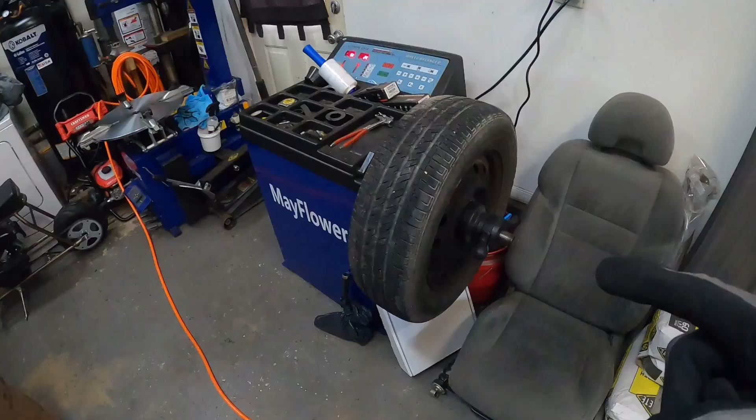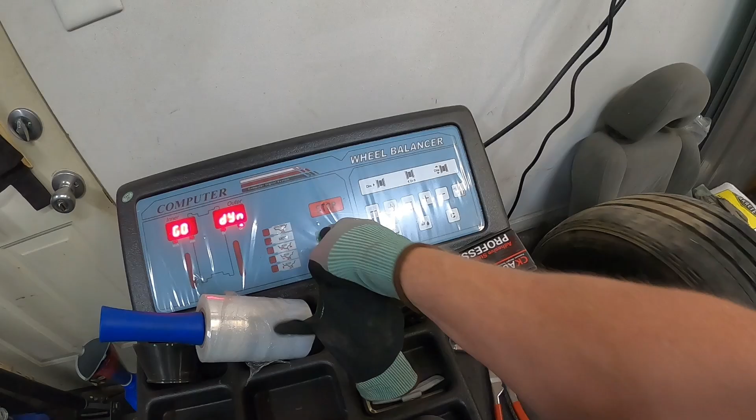So it came with some, the front tires, which we'll get to the car in a minute. Front tires were bald. Guy gave me some new front tires. I'm checking to make sure the tire looks like it's nice and round, because these are used tires, making sure that it doesn't have a belt broken or anything like that.

So I got one there, that looks good. I need to get the other one over here and get it checked out also, make sure that it's nice and round.

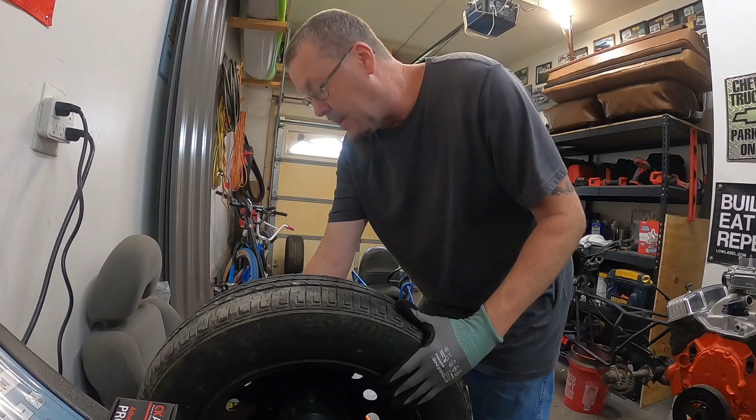And then, what I'll say, it's nice having your own machine.

So all we're using is the tires off of this.

All right, same thing, that one looks nice and smooth and round. So I'm not worried about the balance. I know the balance is off, all that kind of stuff, that's not what I am concerned about. Just wanted to make sure the tires were good.

Now, this is why I love having my own machine. Having my own machines just makes it so easy.

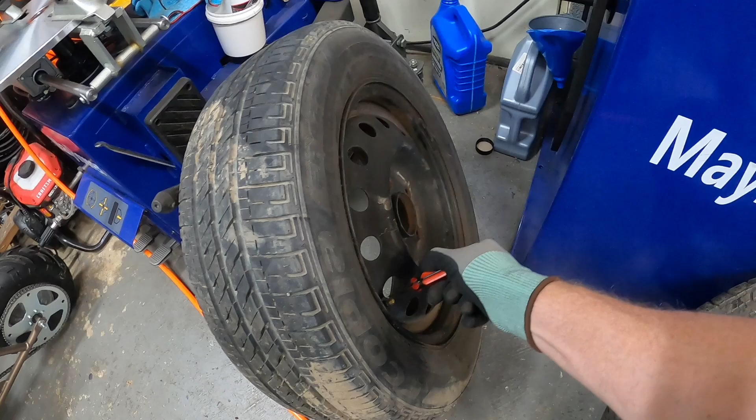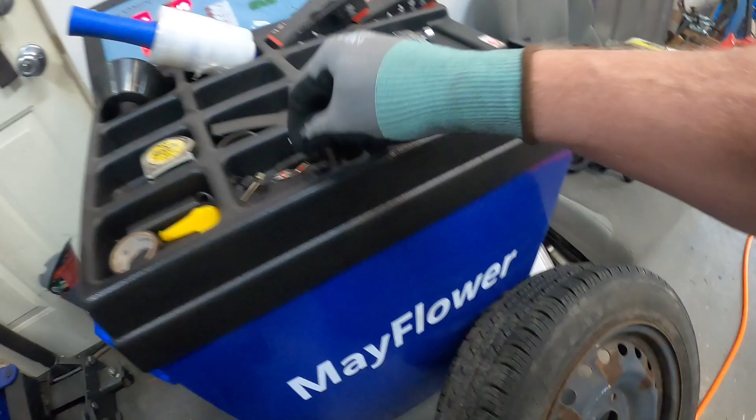Come on, there it goes. Alright, now let's go ahead.

It's currently not raining out, so I wasn't sure if I was going to be able to squeeze this in or not. Now, here it is, a $19.99 Chevy Cavalier.

Yeah, them tires are bald. Back ones got some decent tread on it. Front ones, they're shot.

So we're in the middle of this storm. Right now it's a nice little bit of clear weather, so might as well go ahead and work on this thing while I got some clear weather. I don't know what storm this is, but the storm was coming up and sweeping into us. It was bad today, it's gonna be bad.

All right, let me go ahead, pop all these tires off, and we'll start working on this.

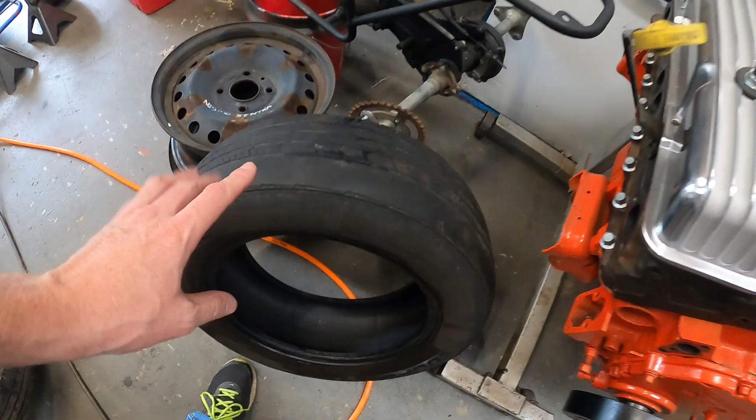All right, first tire, we got that switched out, and you can really see now how bald that thing is. I'm not sure if the alignment is off or inflation was wrong, who knows, whatever. But got a new tire on it, just did it out, zeroed it out.

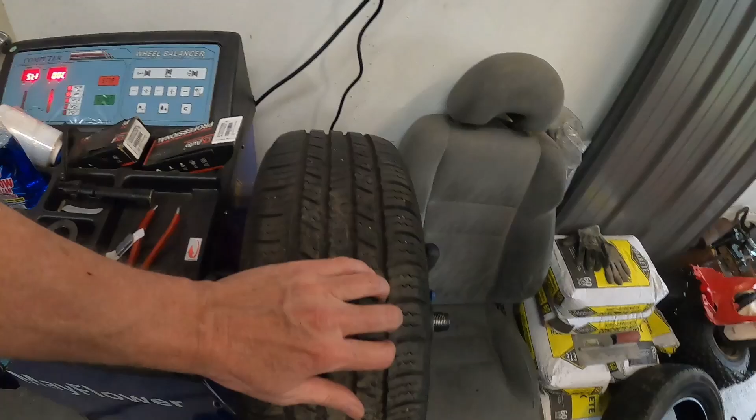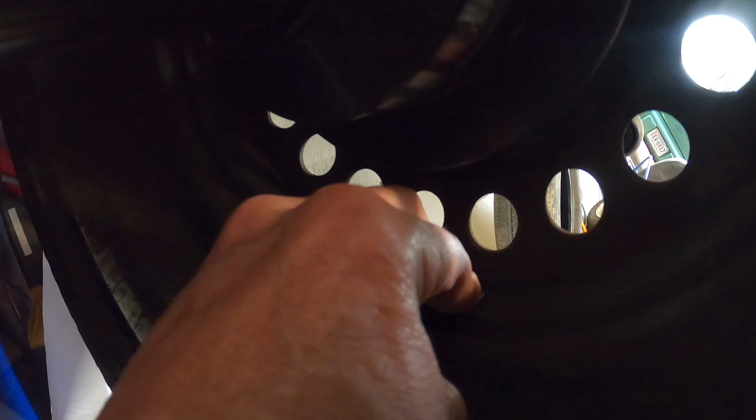Now all I have is sticky weights, I don't have the regular clampy weights, but there it is right there. I cleaned it up really well and it's stuck on there, and well, it's perfect.

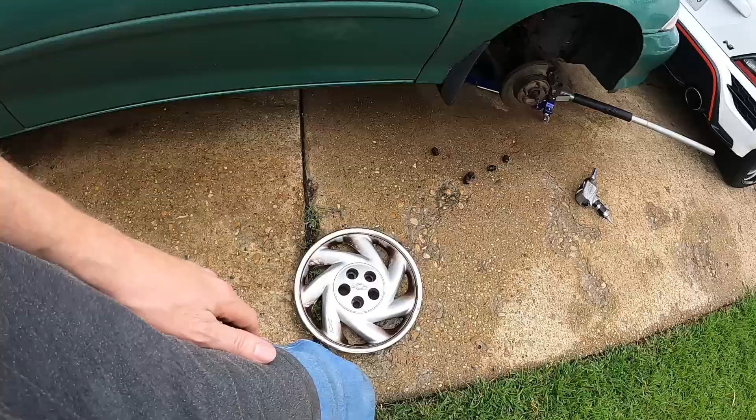Okay. Always got to, always got to. Yeah, it's in there somewhere. Yeah. You too, have a good day.

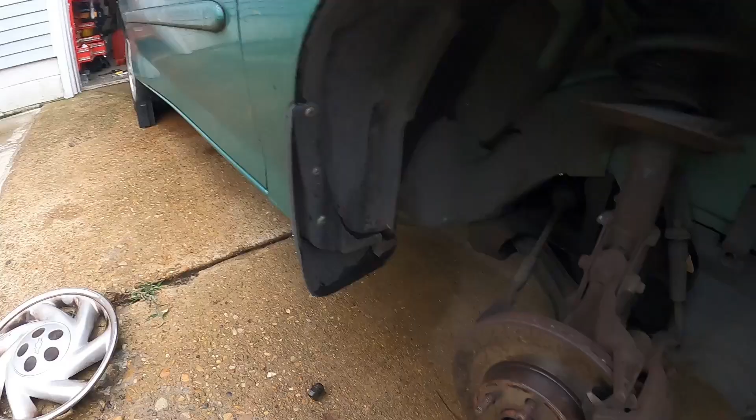All right, well, it's starting to rain, so we're probably only gonna get one wheel done today. But while I got the wheel off, want to just kind of look underneath here.

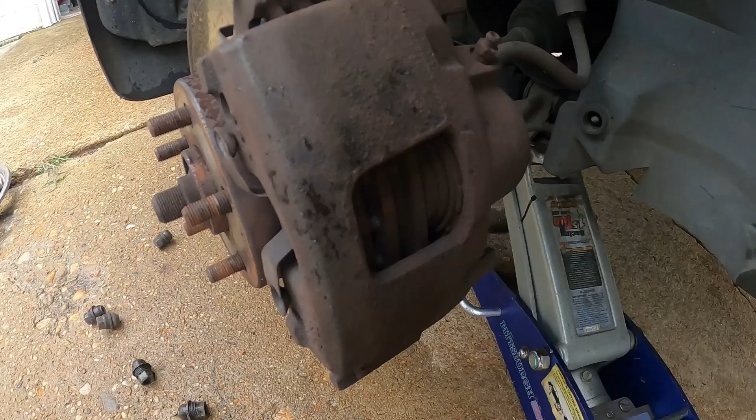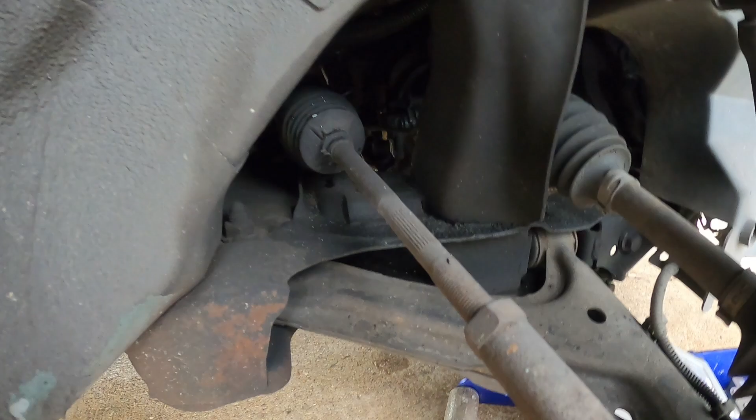Rotor looks good, the brakes are acceptable, there's some meat on them. They need to be redone, but nothing anytime soon. Everything else under here looks decent. Steering rack, all the control arms look good, everything looks good, so I'm not going to complain about this. So it all looks decent. Shocks aren't leaking oil, nothing like that, so that's a positive.

So I guess let me go ahead and get this one wheel on. If it continues just to rain just a little bit, I'll go ahead and get the other one knocked out. This one isn't as bald, but it is really low. Also, there's not much tread on that one, so pretty sure this is all I'm gonna be able to get done. It's one wheel, well, let me get it done.

Okay, I'm back, it's the following day. So worked on the car, got all that stuff done, got the car gone, it will be coming back.

It has a little bit of an issue, I'm not real sure what's the matter with it. It's got some codes, engine codes, all that kind of stuff, but nothing that's major. I think the throttle position sensor's messing up on it, so I have a code for the TPS.

Now, is it causing the issue that it's having? Not sure, but short drives, like a 20-minute drive, runs fine. You're out driving it for half hour, 45 minutes, whatever, it'll just periodically shut off. But then the thing is, you start it right back up, it runs fine. Just kind of weird that it periodically shuts off once in a while.

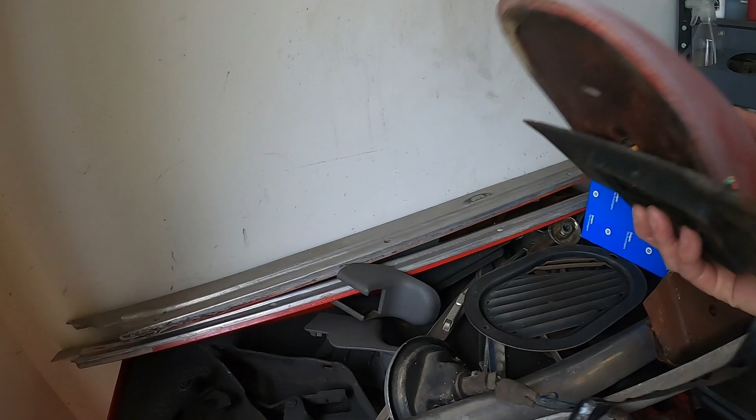But right now, we gotta do some cleaning in the garage. Got me another tote, so I have one space up there, and that's for this tote right here. And this is all my Corvair stuff. So we're gonna be putting all the Corvair stuff into this tote right there.

What did I just drop? Okay.

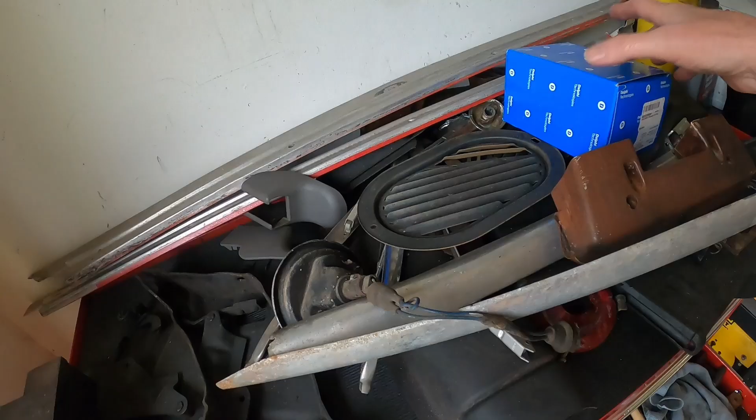I need to get my workbench cleaned off. I got a new fuel pump in it, but I'm still keeping the old one just because. And all of this stuff is still needed because all of this is going back on.

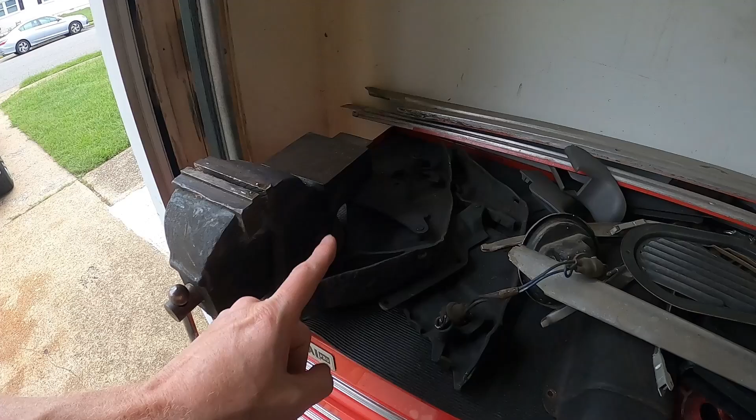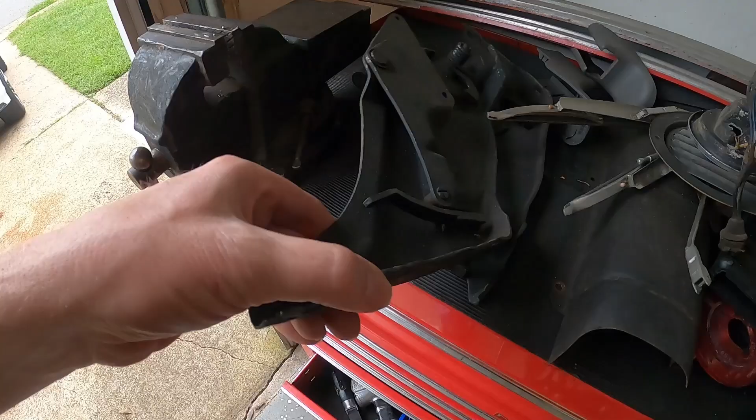The only thing I don't know is I need to post a picture of these online. These little hinge-looking things, I don't know what in the world these things are. That's the only thing I'm not sure about. But gotta get all this stuff put in the car.

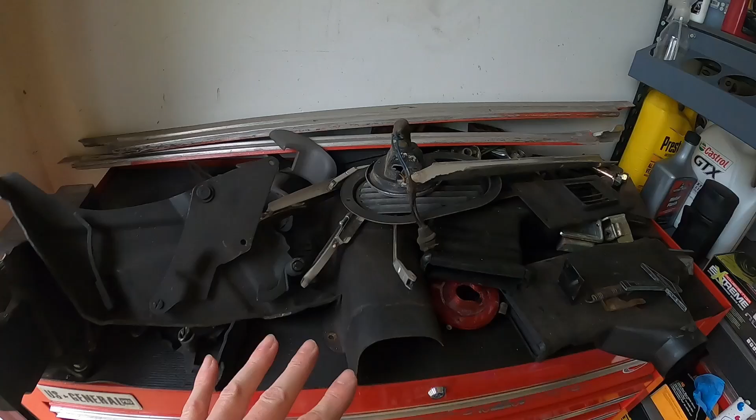Oh, that's Honda stuff. Let's put all this away real quick, and then we'll get to some other stuff, because all this has been sitting up here since I bought the car basically, and it needs to be put away. I'm trying to have a workbench to work on things. Yeah, the only thing is these don't fit in there.

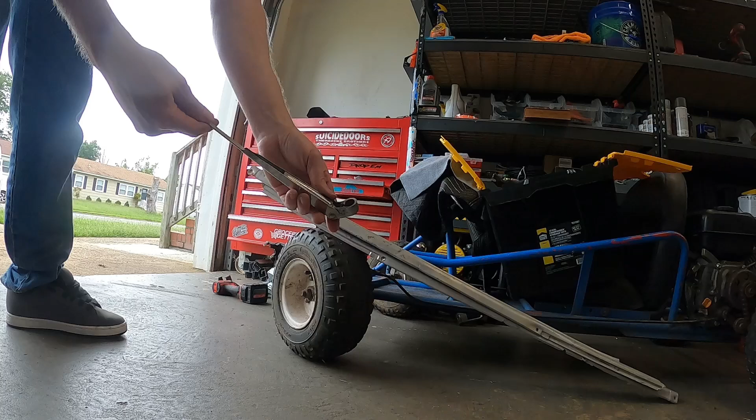I do need to find new wipers online because they're kind of messed up. The way these wipers are set up, this is the same kind of wiper mechanism as Chevy S10s use. So would a Chevy S10 arm fit? Who knows?

Trash. Alright, these are Corvair, these are Corvair, these are Corvair. That's trash. I have no idea what these bolts, these screws are for.

Oh yeah, I did get this the other day. This thing's nice. So, 61, 32nd edition, Chilton's Automobile Repair Manual.

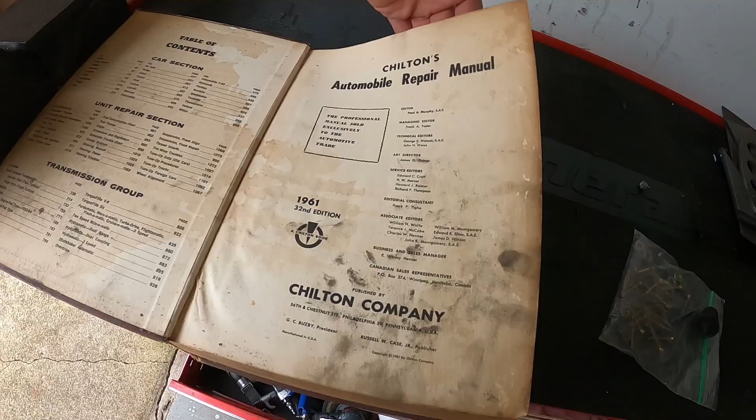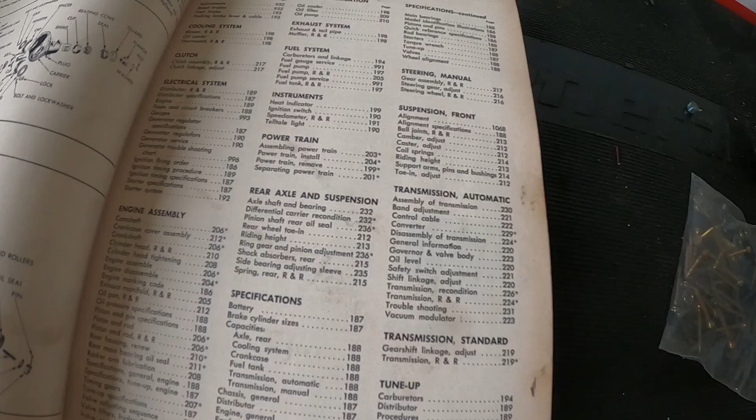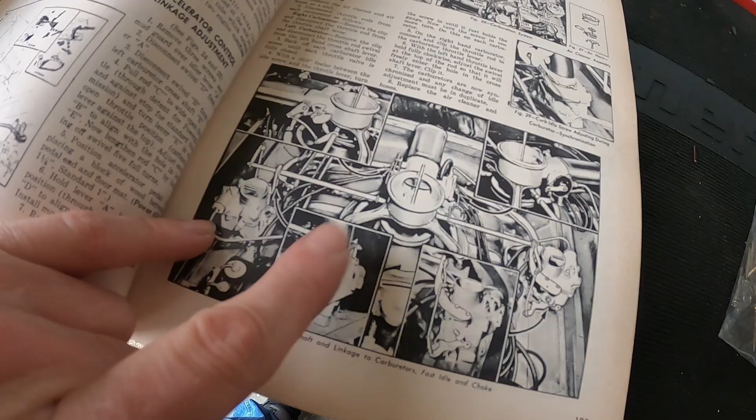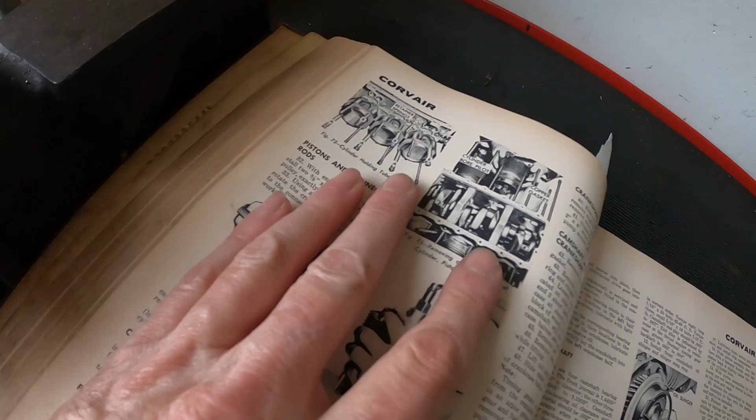And right here, starting here, is the Corvair index. So there's who knows how many pages of nothing but a complete breakdown of the Corvair, the different motor styles. Here's how to rebuild the motor, pulling the cans off, all that kind of stuff. It shows you how to tear the pistons and all that off of this thing.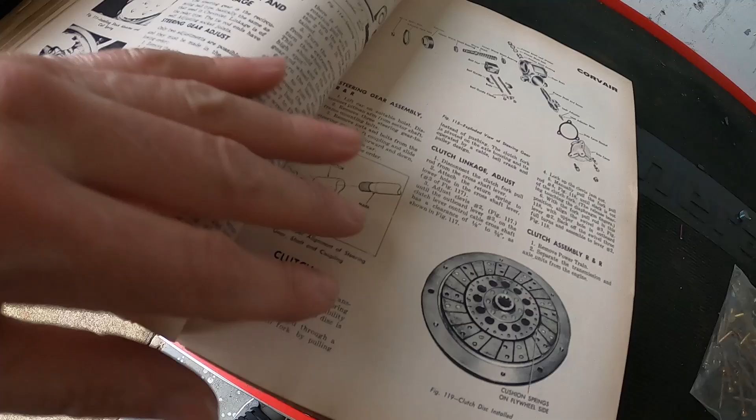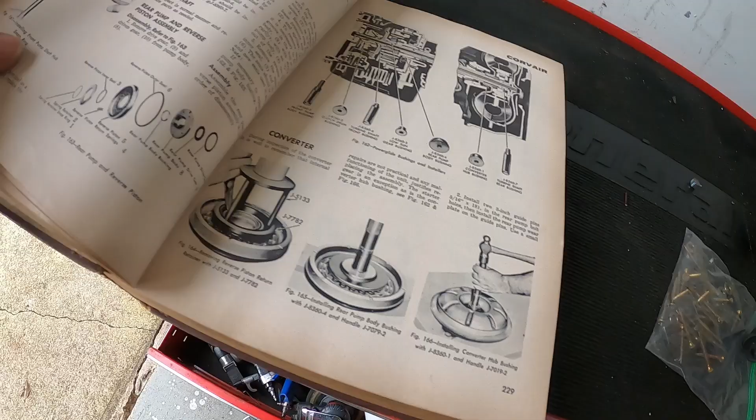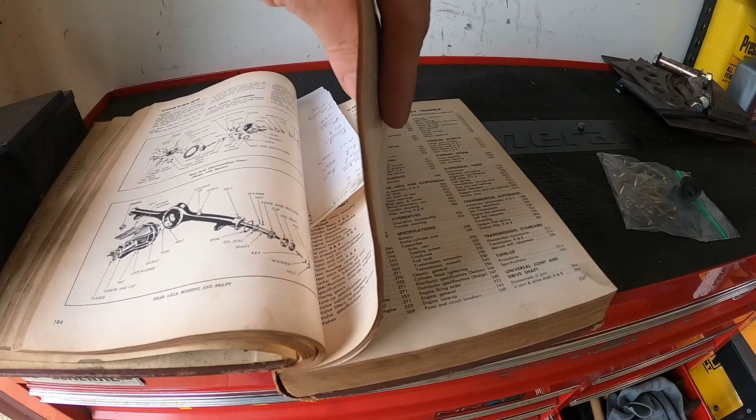There's rear end housing, doing the clutch setup, working the air conditioner. This thing has pages upon pages, there you go. So there's the end of it right there. It's a good little stint, 185 to 236. That's some good amount of pages.

I'm glad I got that, because I've never had a Corvair, never had a rear engine, never had an air-cooled vehicle, so having a book that breaks down everything and tells me how to diagnose anything, tear apart anything, that's a good thing to have.

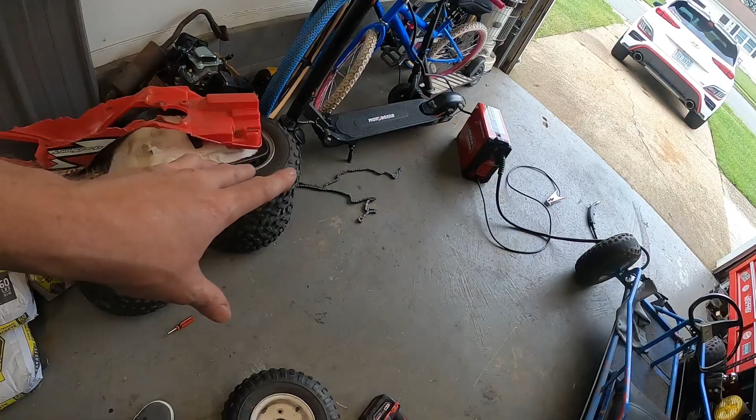Alright, let me go ahead and finish cleaning up a little bit in here, because I got some other things. Just gotta get organized. Okay, so I got most of the garage cleaned up. It needs a little dusting and cleaning, and I meant to grab that chain. So that's my chain off my mini bike that is twisted. I am keeping it because 90% of the chain is good.

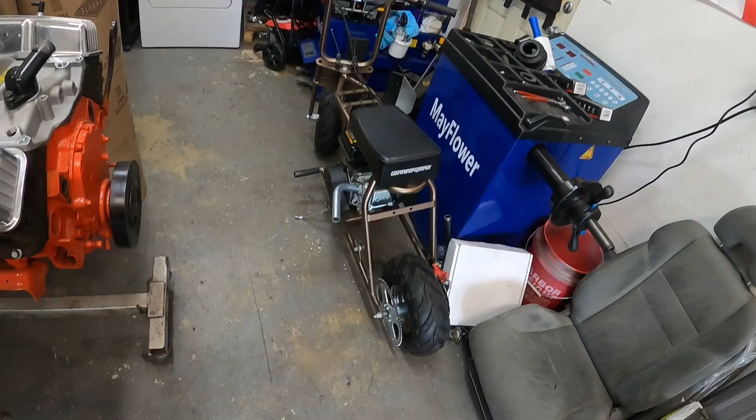I don't know. Okay, so let's get to the mini bike real quick. So yes, I blew the chain out on this, all that kind of stuff. Well, it comes with a 35 chain. Let's go over that real quick.

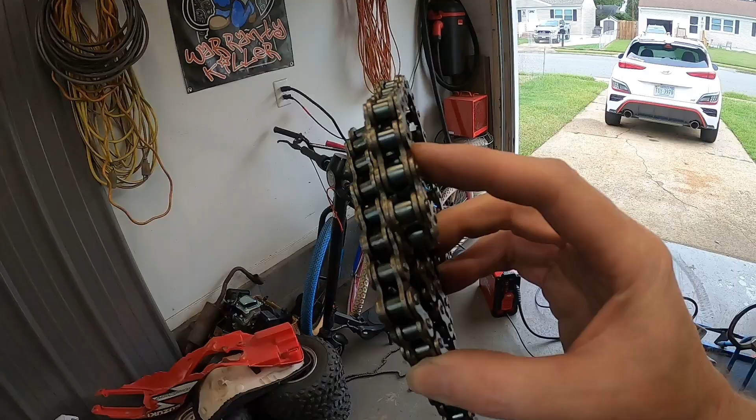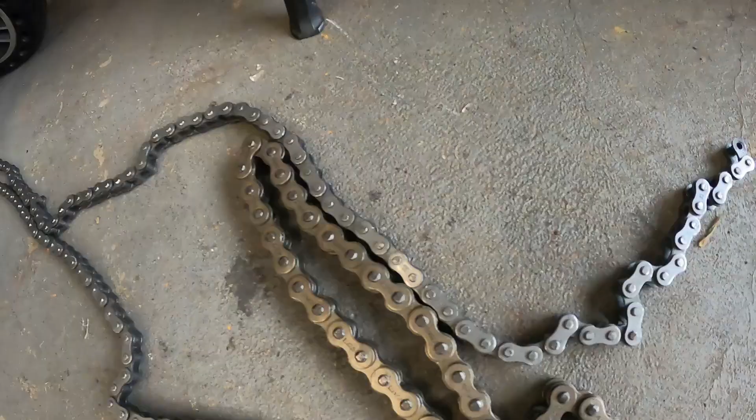This right here is what's a 40, this is a 40 chain. This is what regular motorcycles, ATVs, anything uses. This is a big beefy chain. And then you have that. There's a huge difference. So this right here has a 40 chain, this has a 35 chain.

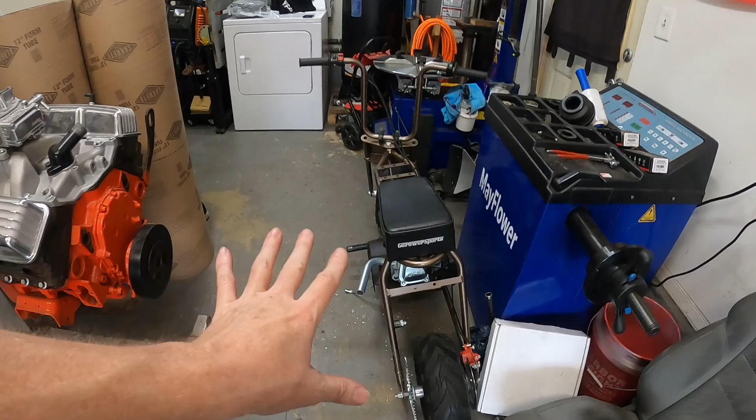That has a 35. Well, I decided I'm going to go ahead and order from GoPowerSports, because that's where I got this. They sell basically the setup to change this over. So new rear sprocket, new chain, and a new clutch. So it's basically a whole brand new setup for this thing, and you're running the 40 chain, because some's 40 and some's 420, whatever.

Reason why I'm going to do it is because it's a mini bike. It's off-road, not for just regular goofing off street use. I've had it on the street, I've had it off-road, I've done a lot of things, and needless to say, a 35 chain just isn't good and strong and beefy. So we're going to switch that bike over to a 40. It's worth it in the long run. Why waste money on buying a new chain? They're not that expensive, but I'm going to wind up breaking it again.

Like I said, I broke one. I know people who have broken them also, same bike, same chain, everything.

So we're gonna go ahead and order, next week or so, the whole setup. It's $100, which is sprocket, clutch, and chain. That's not a bad price. So we'll go ahead and get that ordered.

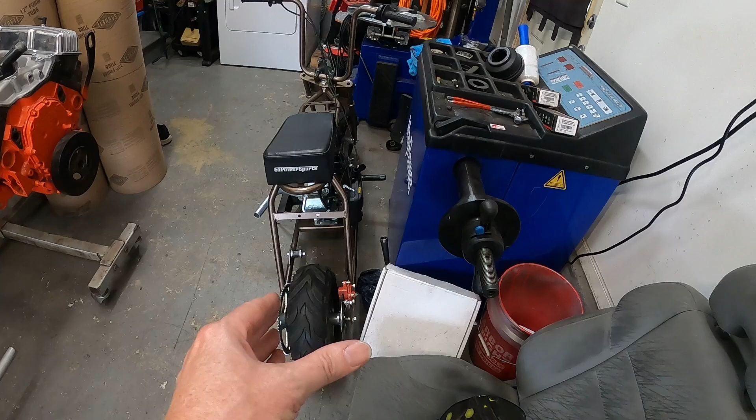The next thing we need to go ahead and order on this after we get it back up and running is the brake system. So this is basically just like a bicycle brake, you pull it and it clamps. It's all right, I mean it works, but it's nowhere near strong enough.

So we're going to go ahead later on and switch this over to a full hydraulic setup with a master cylinder and everything, because it doesn't have the stopping power for what I want. I want to be able to just grab that brake and lock it up. It locked up at first, but over time it's just worn out, and the pads on that thing are already slant worn out. I mean they work, but not very good.

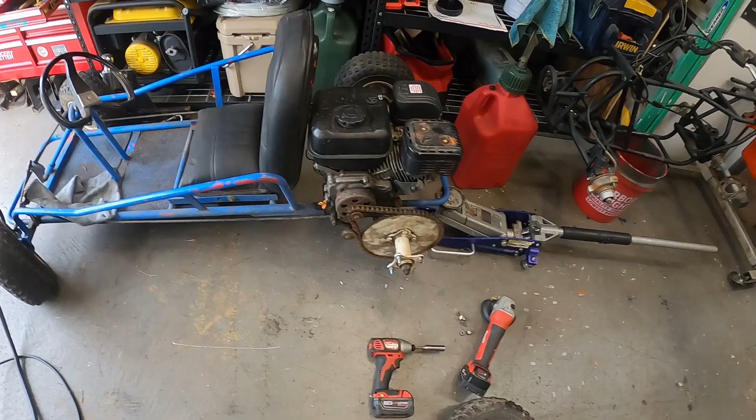All right, on to this thing. So when I was building it and cleaning it up, 2 of the studs broke off right here. So basically the wheel was only held on by 2, which I talked about in one video when I took this thing out and ripped it. Trying to find new press-in studs, all that kind of stuff, that's a nightmare.

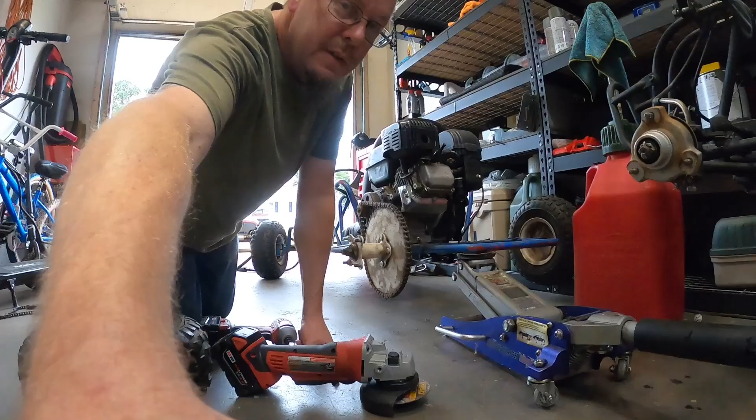So I dug through my bolt bin and just wound up getting bolts. So what we're going to do is just tack them on. I'm not going to fully weld them - I mean yes, I could just ratchet it and all that, but we're just going to put a good tack on them. Plus I need to get my welder out, I haven't used it much, so we want to get this out and use it again.

Alright, there we go. Like I said, we're just going to tack all these. There's only 2 of them. Get these tacked on. Alright, put the face shield on - you know, safety second.

There we go. Like I said, that was something simple anyway. It wasn't like I had to do major welding or anything like that.

Alright, now put the wheel back on. Ow, that was hot. Yeah, I know, I welded it - duh.

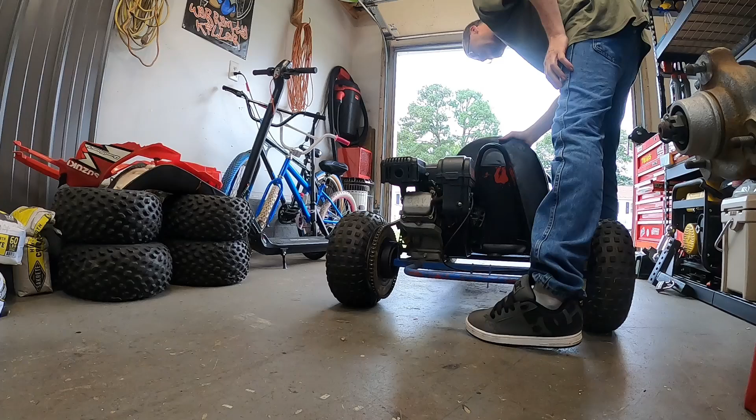Pretty much. Alright, let's see, is this thing even turned on? Alright, that's on. Alright, fuel on. And start, just like that. Not bad when it's been sitting for a month.